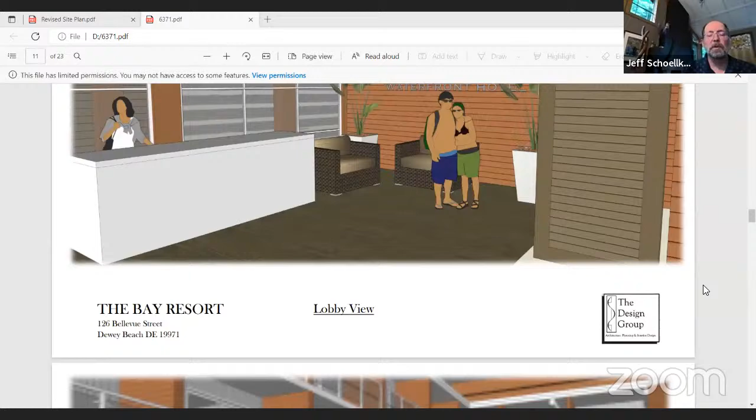Down one more, Kate. This describes the pool enclosure - this is where the improvements are, separating the porches from the rooms, giving them nicer finishes and surfaces, more character than just concrete and stucco. And with the pool enclosure, we're trying to make it more of a year-round attraction.

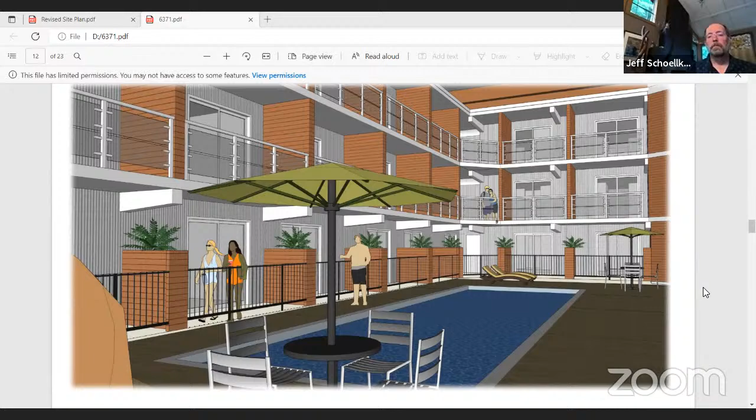Can you slide down one more, Kate? I think there's another view. This is another view of the pool enclosure, looking from the pool enclosure into the lobby expansion.

And that's from the upper balcony, with that same view looking towards the bay.

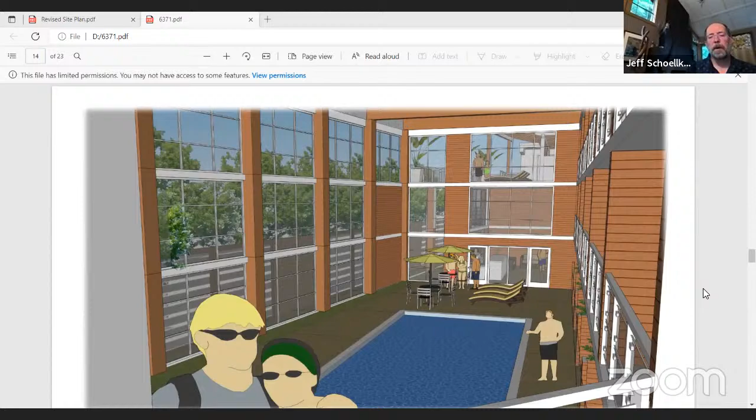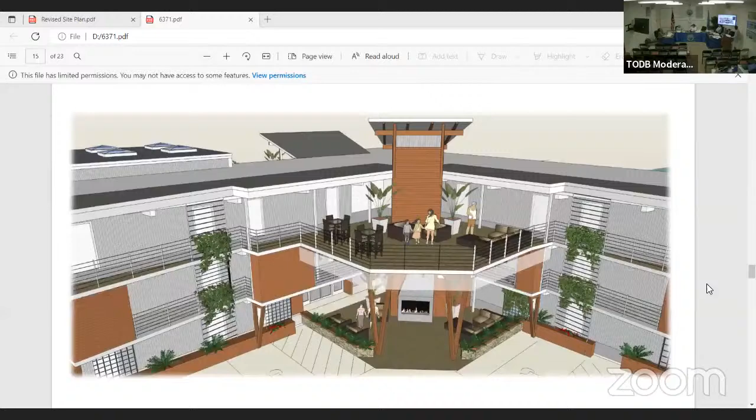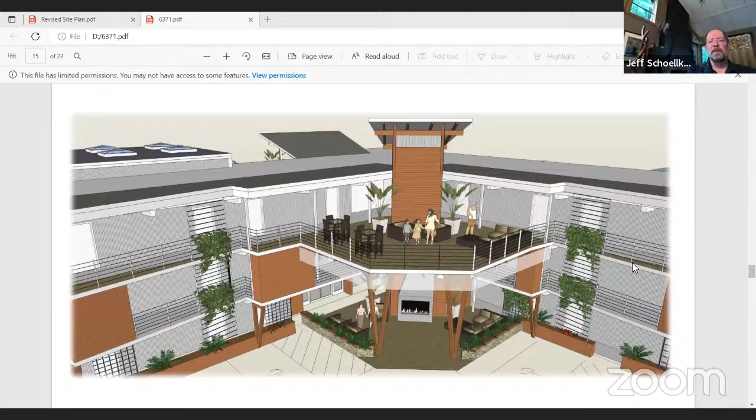Yes, the tower is the elevator, and that's what you all granted at the initial hearing. Right, and you granted it, but not as an exception, not as a variance. I believe it was a special exception as allowed in your code for the safety space above the elevator. Correct.

So this one shows... I'm sorry, Jeff, go ahead. No, I was just going to say, following the last meeting, and as Glenn provided updated plans, the owners have requested that we remove the new outdoor pool and leave the pavilion where it exists, next to the water sports center, just as is. So anything that might be offensive to the neighbors who talked about outdoor noise, or was in the setback - the pavilion was going to be in the setback on Bayard - are not part of the application anymore.

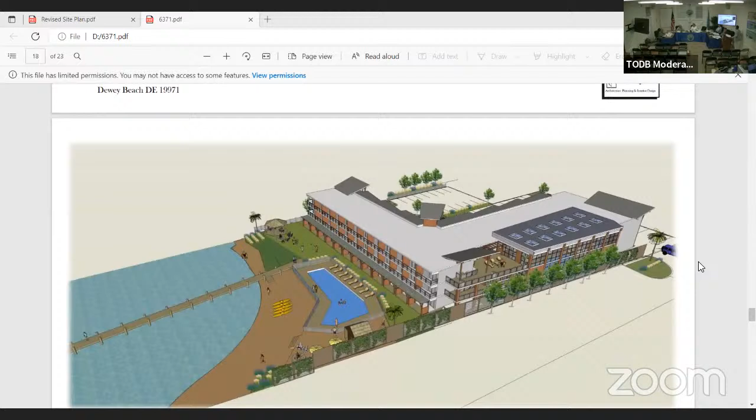If I may, of all the things you were describing - the refurbishing and improving of the interiors and some of the exterior materials and finishes - would any of those require variances? The only thing we're talking about is construction of the 3-story pool cover. We haven't gotten there yet.

Right, so if I have this right, and Mr. Mandalis will correct me - this was a hard issue for me to get my arms around in preparing for the meeting - but the cost of the revitalization project they wish to make exceeds 50% of the value of the existing structure. And because the existing structure doesn't meet our freeboard requirement, they are then prohibited from spending in excess of 50% of the current value on revitalization.

And how much of that 50% is the 3-story covering of the pool? I don't know the answer. I don't know, Jeff, do you have any idea? They were estimating that at about $1.5 million, but they wouldn't do that alone and not do the rest of it. I think they would probably have to leave that off.

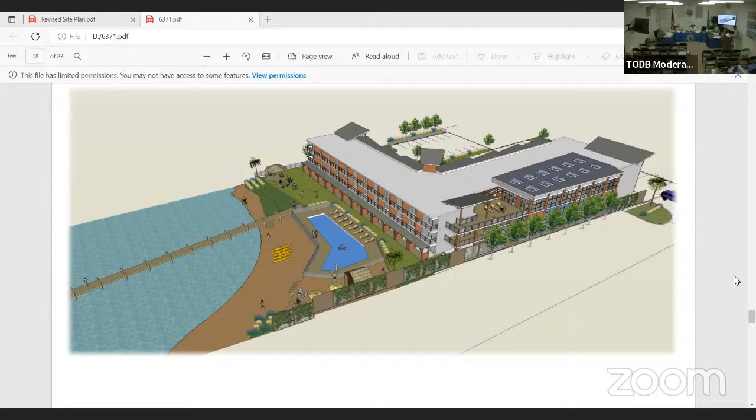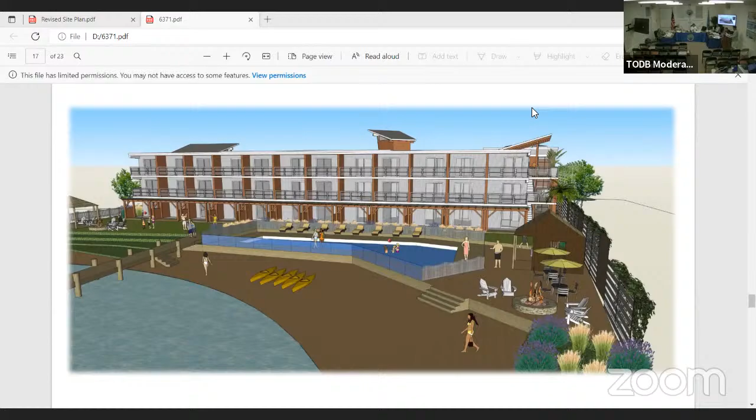Let's go ahead and talk about the pool structure. I'm going to refer back to the letter I sent you. I didn't know I'd have a chance to comment on it today. So the pool decking structure extends 7 feet into the 10-foot rear yard setback. Let me read this, because we had a discussion last time about whether this is a side yard, front yard, or rear yard setback.

Based upon the discussion we had, we did the analysis, and I do think it qualifies as a through lot, which changes the setback. As I characterized it, because the property qualifies as a through lot, the Dagsworthy Avenue setback is treated as a front yard setback of 18 feet. My client's variance request is for the proposed pool enclosure and multi-level deck structure to extend 15 feet into the 18-foot rear yard that is treated as a front yard setback. So you're right, that is a 15-foot variance into an 18-foot rear yard setback technically.

Although we previously requested a rear yard setback variance to permit the proposed pool enclosure and multi-deck structure to extend 7 feet into the 10-foot rear yard setback rather than 15 feet into the 18-foot rear yard, substantively the request has not changed. In fact, the existing pool deck already encroaches the setback slightly further than the amount of encroachment requested here. So the enclosure is going to be slightly back from where the existing concrete around the pool exists now. Technically, you're right, this is treated as a second front yard setback because it's a through lot, but substantively, the location where it exists is what we requested earlier.